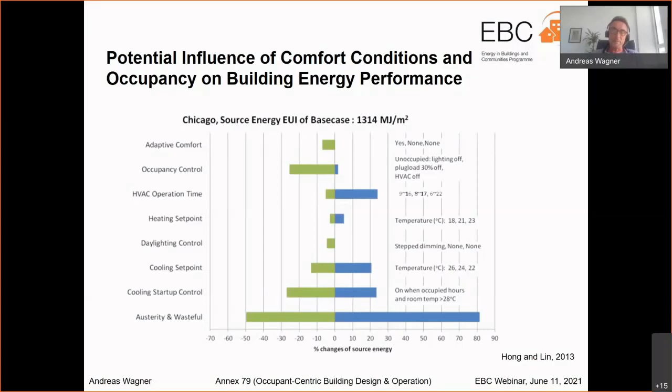Now, if you look into the literature, there are a large number of studies, mostly simulation studies, showing the potential influence of occupants, occupant behavior, comfort conditions on building energy performance. Just as an example, this study was done by Hong and Lin in 2013, showing different comfort conditions and the effect of occupancy and how that relates to building energy performance. And it's very obvious also from other studies that there can be a great impact on building energy performance and also building performance in general, meaning the performance operation of HVAC systems.

Interestingly enough, if you look at studies a bit deeper, and this was done by Ardeshir Mahdavi, Christiane Berger, and others in subtask 1 of our annex, they wanted to find out the role of occupants in the building energy performance gap. Their central finding was, and they reviewed more than 100 articles for that, that the existing studies do not really provide convincing evidence for the purported significant contribution of occupants to the energy performance gap, which doesn't mean that there is no influence, but obviously the studies didn't tell in detail.

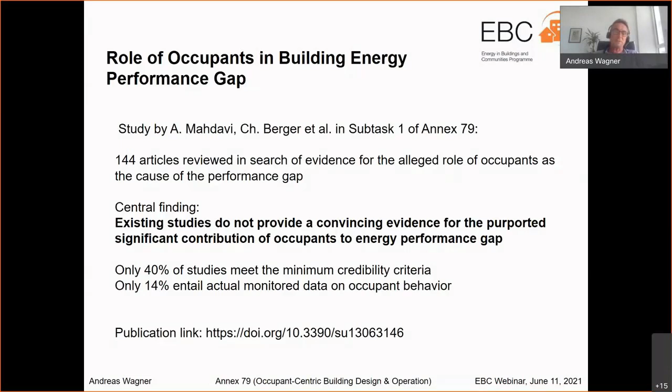There were only a few studies where you can find actual monitored data on occupant behavior. So this is a clear message. If we want to study the role of occupants deeper, better studies have to be done with better monitoring and a more transparent procedure for how to do these studies. However, we all know that there are a lot of interventions of occupants in buildings, and they obviously do influence building performance in a way.

So what are reasons for occupants' interventions? Occupants might be dissatisfied with building automation, meaning that they either override set points or behave differently than the automation assumes. Another reason might be that interfaces are not designed for the intended purpose or are not even equipped with the relevant functions. In a wider sense, regarding the whole building concept, planners probably do not consider occupants' needs in the building design. And the same is true for building operation. On the other hand, for buildings with intended interventions, like passively cooled buildings, we have these interventions which we have to be aware of and which we have to know better.

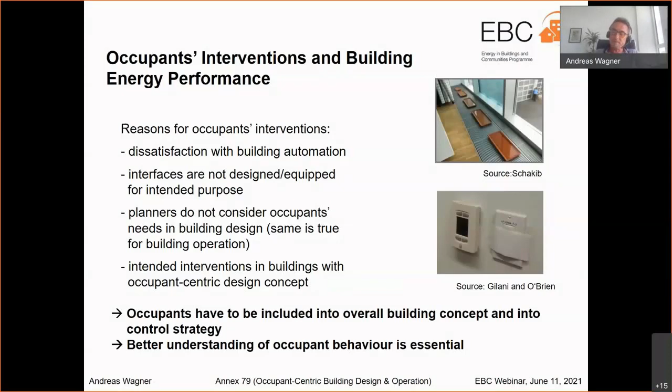So a conclusion from this would be that occupants have to be included into the overall building concept and into the control strategy to better harmonize occupants' needs and building performance. And for that, we also have to better understand occupant behavior. In Annex 66, there has already been a lot of work on occupant behavior in the context of building energy performance. This annex provided a really sound framework for experimentally studying and modeling different behavioral actions, and also a framework for implementation of occupant behavior models into simulation platforms. But we still see a large discrepancy between this available knowledge, these available models, and the actual building design and operation practice.

And there are still a lot of open questions which have not been answered in Annex 66, for example, the impact of so-called multiple indoor environmental parameters on human perception and the resulting behavioral reactions, meaning that most models look at single environmental parameters like thermal or visual parameters, but not the interaction between both. Another question would be how do building control interfaces and their underlying logic affect behavior, or how can building automation systems and other available data sources be better leveraged for improving occupant-centric building concepts? And finally, what kind of information has to be provided to designers and building managers to better apply occupant behavior knowledge and the existing models in building practice?

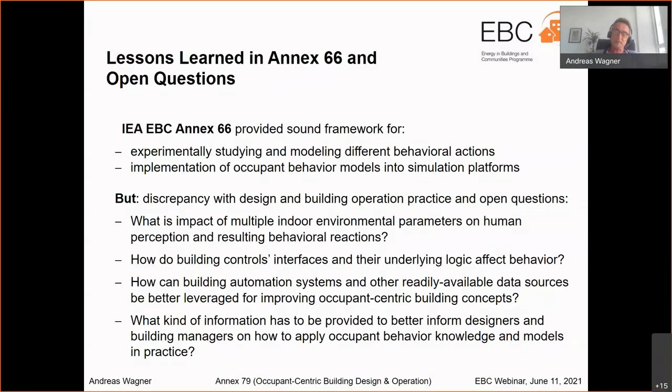So for this, we started a new annex, Annex 79, about 3 years ago. The main objectives of this annex are the following. We would like to improve the knowledge about occupants' interactions with building technologies. And there are two focuses. One is the comfort-driven actions caused by these multiple and, very often, interdependent environmental influences, which are, as I said, not yet covered by current models. And we also focus on building technology interfaces in terms of their suitability for taking advantage of adaptive opportunities and their effect on building energy consumption.

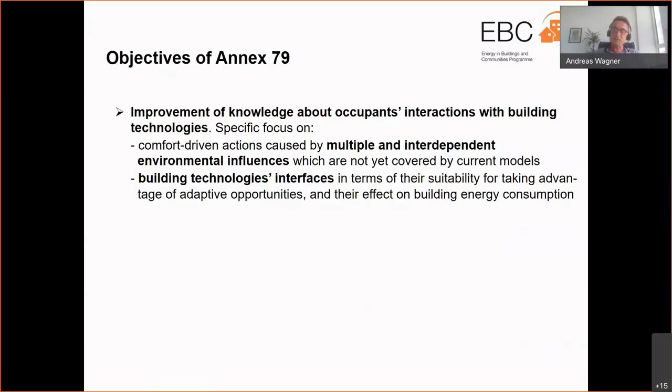The second objective would be the deployment of big data, meaning data mining, machine learning, artificial intelligence for the building sector. There's a lot of knowledge and methodologies available already in different domains, and we would like to foster this for the building sector together with new technologies for data collection with different sensors.

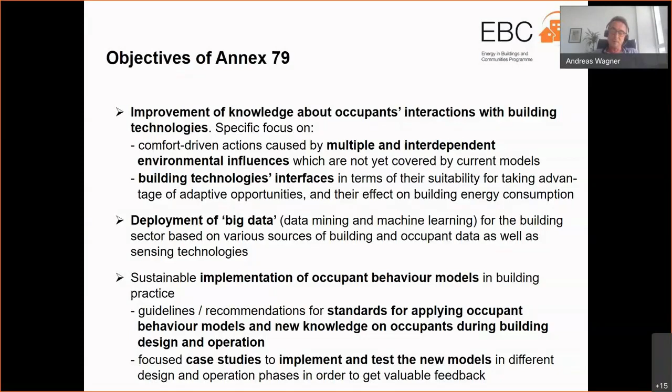And then more on the application side, we would like to implement occupant behavior models in building practice, which means that we work on guidelines and recommendations for standards for applying occupant behavior models and this knowledge about occupants during building design and operation. And we will also look at different case studies where we would like to implement and test these new models in different phases, either the design or operation phase, in order to get some feedback about these methods and models.

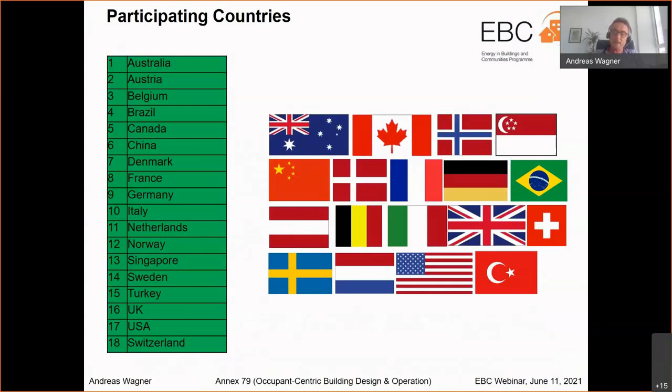We have quite a large group. We have people working in Annex 79 from 18 countries all over the world, attracting roughly 100 to 120 participants in our meetings and symposiums. And the next slides will show you some ongoing activities.

Then another goal is to define conditions for multi-domain IEQ standards, and most importantly, to build up a framework for multi-domain studies. So what is the experimental background and framework to study these multiple effects more in detail and come out with comparable results?

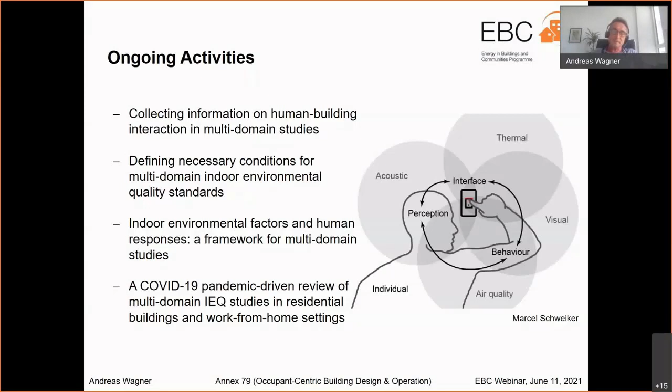Subtask 2 is trying to advance methodologies and tools for data-driven occupant presence and action modeling and their implementation. And there are 3 main packages. So the first focus would be what are the typical occupant profiles, and they will be extracted from the ASHRAE Global Occupant Behavior Database, and this information is mostly relevant for the building design phase.

Then the second package would be how to measure occupant behavior, where the aim is a guideline on occupant data collecting and modeling, which is mostly important for the construction and commissioning phase of a building. And finally, for the operational phase, they will try to answer the question how to evaluate occupant behavior models, which means that they will provide a framework for sharing and evaluating occupant behavior models.

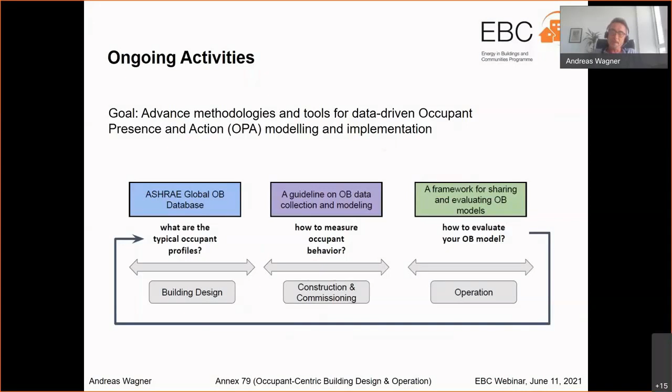Looking into design practice, this is the main focus of our subtask 3. So based on reviews on codes and standards involving performance-based design, they will firstly look at ways for communicating occupant related assumptions between stakeholders. So which information is available about occupants and occupant behavior in the different phases of the design process and for the different stakeholders involved in the design process.

This will then go into the design process where occupants will be investigated in terms of their role in the building design workflow, and to extract the occupant perspective and needs to inform building designers. This all goes then into simulation-aided design methods. So what does it mean, modeling occupant behavior in the design process? A very important topic is the fit-for-purpose occupant modeling approaches and simulation-aided occupant-centric design.

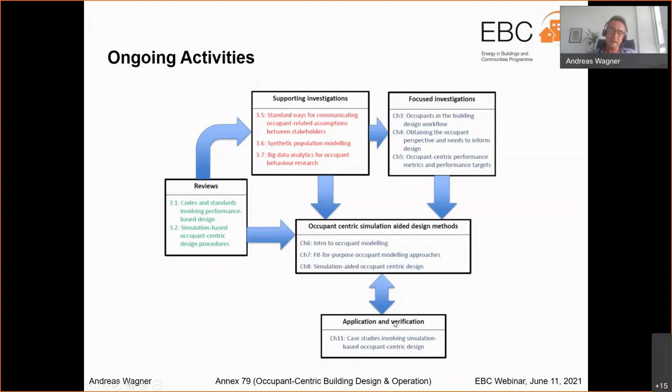This will be mirrored by findings from case studies, as I said before, where a couple of these models will be applied in different phases of the design and will be validated against design practice.

And finally, we have subtask 4 looking at building operation, which is mainly occupant-centric controls. Again, based on a literature review, they are going to interview building operators to get their view on the building operation and integration of occupants in building control, and then a number of activities trying to describe occupant-centric controls to come up with a taxonomy.

And finally, then integrate occupant behavior models for controls into simulation and into building automation and building management software. Also here we have case studies which are not explicitly mentioned in this graph, where these controls will be implemented and tested, and then again, findings will be drawn for future perspectives.

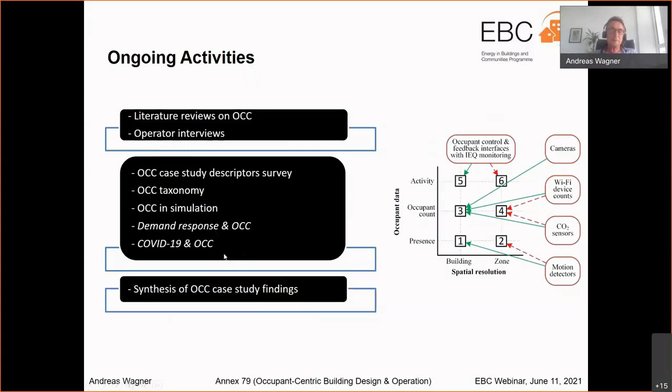What are the outputs of this annex so far? The annex started its work in 2019. So first of all, we did a very thorough review on research papers on the different facets of this annex, and we were allowed to put them into one special issue of Building and Environment. So I can really recommend to get this special issue, which gives a very good basis about the current knowledge in the field of occupant behavior or occupant-centric building design and operation.

There's a second special issue on its way, which is focused on occupant-centric controls in the Journal of Building Performance Simulation. We did a contribution to the ASHRAE handbook, and we will also work on a REHVA guidebook, the European equivalent to ASHRAE. All the findings so far can be found in research papers. We published 29 journal papers in the last 2 years. And if you're interested in these papers, you might want to go to the Annex 79 homepage, where we have a whole list of these publications, and you can also find them in our newsletters. And that's about it.

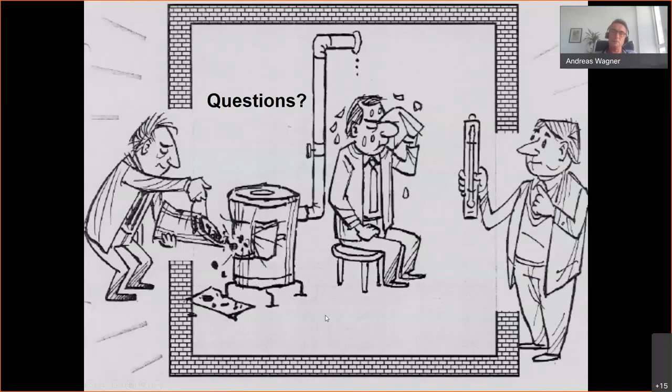Oops. Sorry, there's obviously some noise behind the slides. Sorry about that. Nevertheless, I'm open for questions, and I hand over the floor to Peter Op 't Veld, who will give

you the Dutch perspective. And if you look at the CV of Peter, there's one thing to remark. He has been attending 10 different IEA annexes. Peter, the floor is yours.